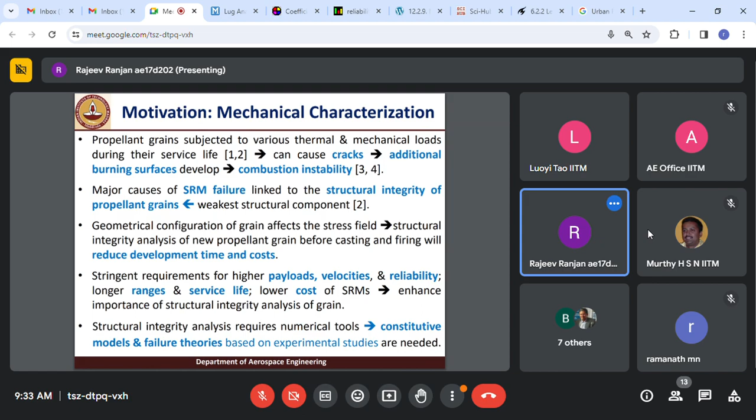The objective of this thesis was to study the mechanical behavior of composite solid propellant by conducting uniaxial tests and biaxial tests on cruciform specimens. Also, the fracture surfaces of these uniaxially and biaxially loaded samples are studied using a scanning electron microscope and energy dispersive spectroscopy to understand the damage growth mechanism and failure.

The scope of the work for this thesis was to conduct uniaxial and compression tests at constant displacement rates, for which DIC was utilized to measure strain. Relaxation tests have been conducted at constant strain. Biaxial tests on cruciform specimens are conducted at various displacement rate ratios and temperatures. The fracture surfaces under these loading conditions were then studied by taking into consideration fractography and energy dispersive spectroscopy.

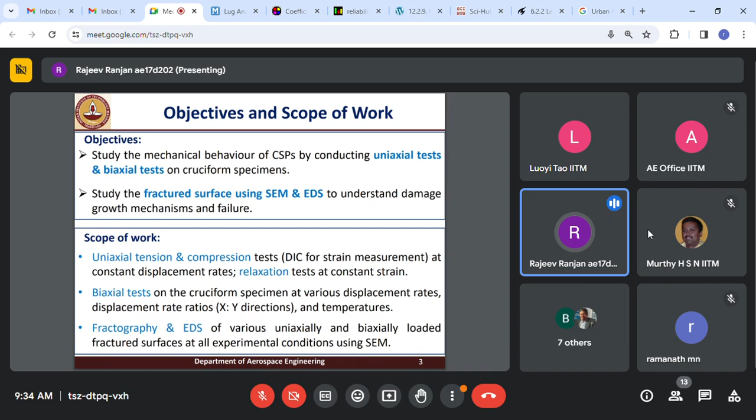This is a uniaxial tensile testing setup. A 500 Newton Zwick Roell UTM with a pneumatic grip is utilized for uniaxial testing. Two cameras facing the front and lateral surfaces of the specimen were utilized to measure all the components of strain and the deformation field. The uniaxial test samples were fabricated as per the ASTM D638 Type 4 standard.

Since the composite solid propellant is a viscoelastic material, relaxation modulus is an essential mechanical property. In order to get the relaxation modulus, a relaxation test is conducted at 5% constant strain. To reach that 5% strain, a high displacement rate of 500 mm per minute is considered. This is because a relaxation test is the response of the material to instantaneous deformation. Then at this 5% strain, the specimen is held for 180 minutes, and the decrease in force with respect to time is recorded.

Then using that force, stress is determined, and using this formula, relaxation modulus is determined. Here the blue line represents the experimental data of relaxation modulus variation with time. This experimental relaxation data is fitted with a Prony series, which is shown here. Eleven terms of the Prony series are considered, and we observe a good mathematical fit for the experimental data.

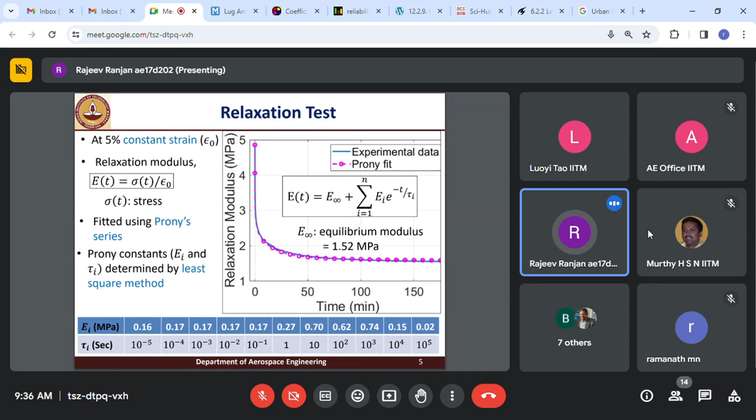Uniaxial tensile test was conducted at 1, 7 and 50 mm per minute. The dotted line here indicates the nominal stress, and the solid line indicates the true stress. For nominal stress, the initial cross-section area is used, whereas for true stress, the instantaneous cross-section area is required, and that instantaneous cross-section area we measured by measuring the instantaneous width and thickness of the specimen using DIC.

The first plot here indicates the stress-strain response of the material up to failure, and this plot is just a zoomed-in view of this stress-strain response up to failure. This plot is up to 50% strain to see the initial behavior of the material. It was observed that the stress-strain response was non-linear, and it was dependent on displacement rate. Tensile modulus and yield stress were increasing with increasing displacement rate.

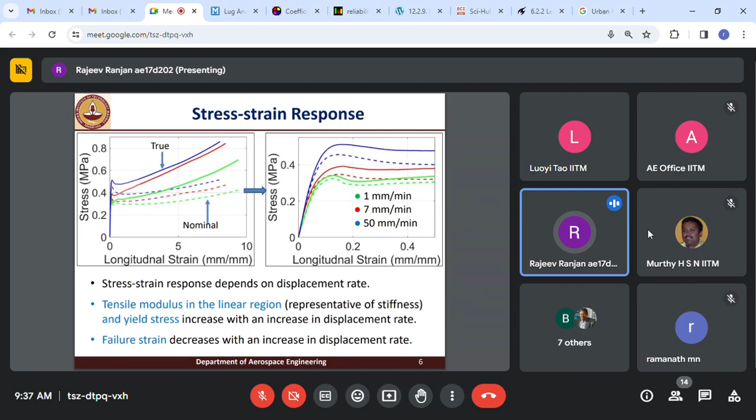Poisson ratio is also an essential mechanical property for structural integrity analysis, and it was determined during the uniaxial tensile test. Since there were two cameras, Poisson ratio was calculated on both the lateral as well as the transverse surface, and it has been observed that the Poisson ratio variation was the same on both surfaces and for all the displacement rates. It was close to each other. At the beginning of loading, it was 0.5, and then as the strain was increasing, the Poisson ratio was decreasing.

The reason behind this is that as the material deforms during loading, the bonds which are responsible for contracting the lateral and transverse surfaces of the specimen break, and then its capability to contract reduces, leading to a reducing Poisson ratio as the strain is increasing.

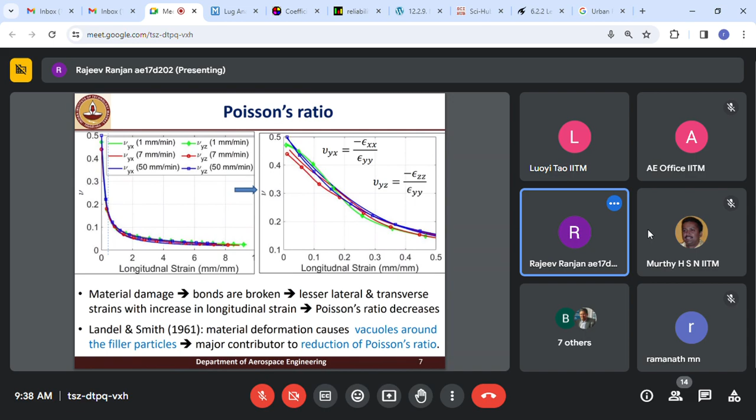We determined the dilatation during the uniaxial tensile test; this finite strain dilatation formula is used for that. This response shows the dilatation up to failure, whereas this is the zoomed-in view of the dilatation up to 50% strain. Since in composite solid propellant the matrix is a polymer material, which is nearly incompressible, and the solid particles are comparatively rigid, they don't undergo any volume change. So whatever dilatation we observed, we can say it is coming from vacuole formation in the material. So based on that, we divided the dilatation response into three regions.

The first region was where dilatation was nearly zero, up to 2% strain. So in this zone, there is no detachment of the solid particles and no vacuole formation. In the second region, the dilatation was increasing at an increasing rate. In this region, vacuoles are getting formed because of the strain in the material, and some existing vacuoles which formed after 2% strain are growing in size. So two phenomena, the growing size of the vacuoles as well as the formation of new vacuoles, are happening in the second region. That's why dilatation is increasing at an increasing rate.

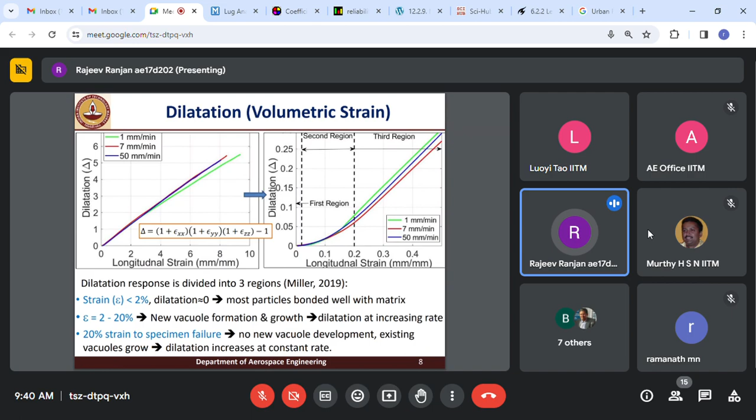In the third region, we observed that the dilatation was increasing at a constant rate with strain, and this is because after a certain strain, for this material around 20%, there is no new vacuole formation, and only the existing vacuoles grow in size, leading to an increase of dilatation at a constant rate.

We conducted a uniaxial compression test, and to measure strain, 3D DIC is utilized. This is because 2D DIC is suitable only for planar measurement of the strain or deformation field of a planar section which undergoes planar deformation without large out-of-plane deformation. However, in the compression test, although the surface was plane at the beginning of loading, as the load is applied, due to barreling the surface becomes curved, and also there is large out-of-plane deformation during compression testing. Due to these two reasons, 2D DIC is not suitable for measuring strains during uniaxial compressive loading, and that's why 3D DIC is utilized.

For 3D DIC, two cameras need to be placed at an angle as shown in the figure here. One of the problems in compression testing is barreling of the specimen. In order to minimize barreling, lubricant has been placed between the compression plates and the specimen surfaces. However, it was observed that we were not able to eliminate it completely.

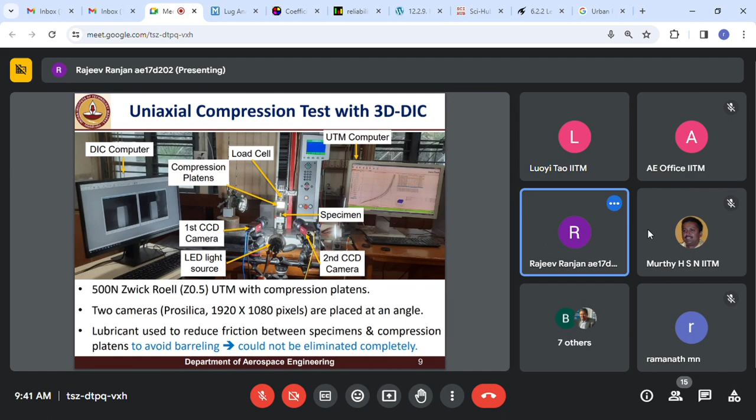This is the compressive stress-strain response. The first plot shows nominal stress versus nominal strain, and this is true stress versus 3D DIC strain. There was a large difference between the nominal and true stress responses. Similar to uniaxial tensile loading, here also it was observed that the response was dependent on the displacement rate, and it was nonlinear.

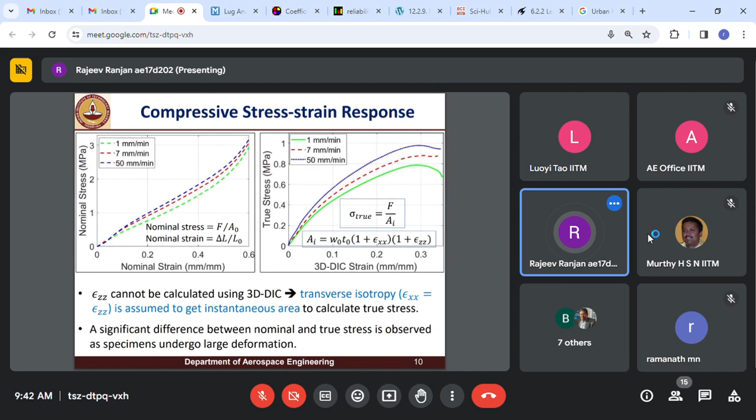During compression loading, dilatation and Poisson ratio were also determined. The same finite strain dilatation formula and Poisson ratio formula used for tensile loading is used for compression loading. We observed that up to around 10% strain, dilatation was nearly zero, and the corresponding Poisson ratio was close to 0.5. However, after that, both dilatation and Poisson ratio were increasing, and it seems the reason behind this is the barreling and damage in the material.

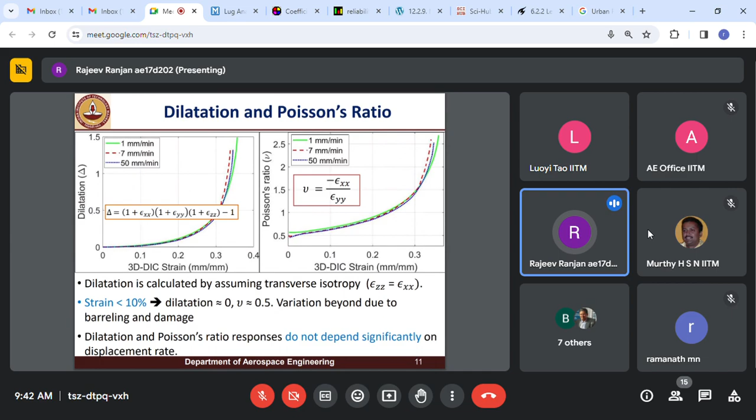We conducted biaxial tests, and there are two reasons behind this. First, the propellant grain in solid rocket motors is subjected to a multi-axial stress field, so conducting biaxial tests will be a more accurate representation of the expected behavior. Secondly, CSPs, when cast as grain in solid rocket motors, are quasi-isotropic in nature. However, upon loading, micro voids form and it becomes anisotropic, and biaxial testing is essential to characterize anisotropic material. Due to these two reasons, we conducted the biaxial test on composite solid propellants.

In literature, there are various techniques to do the biaxial test, like bulge test, combining tension and torsion, combining bending and in-plane, as well as combining axial load and internal pressure, or using cruciform specimens. Out of these techniques, biaxial testing on cruciform specimens is more promising, because different stress on the sample can be obtained by altering the displacement or load ratios in two mutually perpendicular directions.

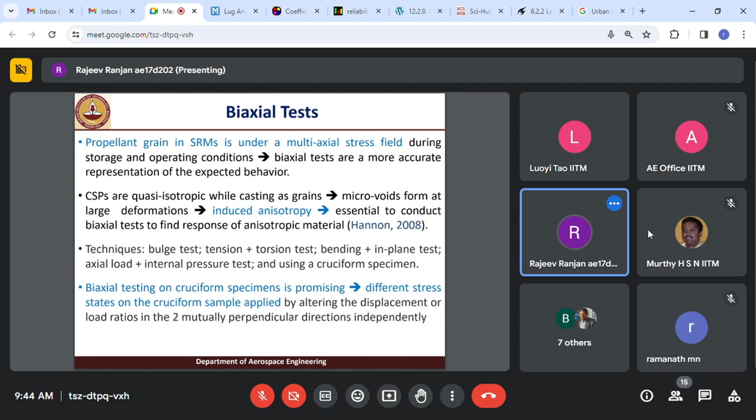In order to do the biaxial test, the first step is to design a cruciform specimen for composite solid propellants, because there was no standard geometry for that. To get the optimized geometry, we considered two design criteria. First, the stress should be maximum at the gauge area so that the specimen fails there. That is necessary because only then will we be able to capture the behavior of the material up to failure. Otherwise, one of the biggest problems in conducting biaxial tests is failure of the arm of the specimen. The second design criterion was that there should be homogeneous stress and/or strain distribution at the gauge section.

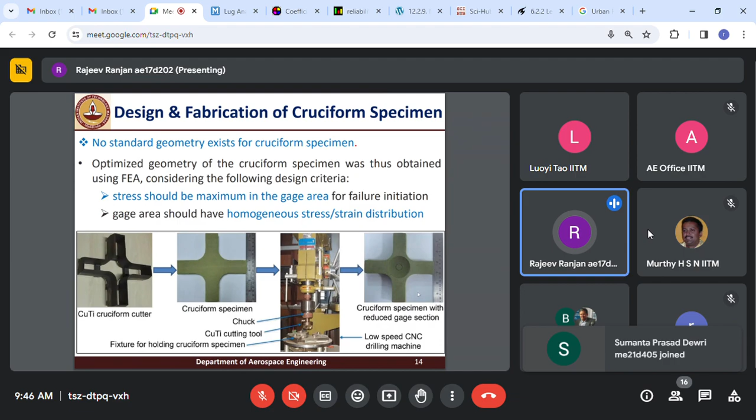This is the flowchart for the fabrication of the cruciform specimen. First, a copper titanium cruciform cutter was used to cut the cruciform specimen out of the CSP plate, and then using a CNC drilling machine, the center section of the material is removed. This is the final shape of the cruciform specimen.

Biaxial tensile tests were conducted on a 5 kN BISS biaxial testing machine, which contains a hydraulic power pack and a loading frame on which 4 double-acting hydraulic actuators are mounted, and each hydraulic actuator contains pneumatic grips which hold the specimen during the experiment. Since we conducted experiments at controlled temperatures, an environmental chamber was used. All 4 actuators contain load cells and displacement sensors. In this study, the average load measured by 2 load cells along each direction is considered for determining stress at the gauge section.

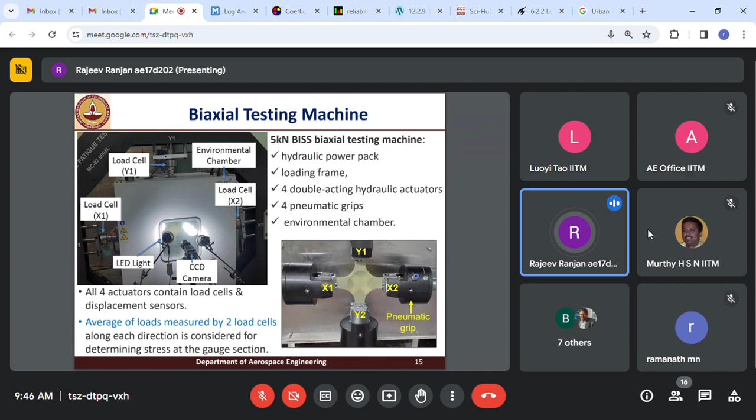Since in the cruciform specimen there is no clear resisting area, stress cannot be estimated directly as load per unit area. In order to calculate the stress, the fraction of applied load which bypasses the gauge section needs to be determined, and to do that, we used the FE software Abaqus. Since the geometry and loading were symmetric, only a 1/8 portion of the specimen is modeled, and symmetric boundary conditions were used. A hyperviscoelastic model was considered for this FE analysis.

Based on this FE analysis, we observed that the bypass factor for equibiaxial loading was 17.6% in both x and y directions, and for biaxial loading with a loading ratio of 0.5:1, it was 11.11% in the x direction and 20.05% in the y direction. We also conducted this FE analysis considering a linear viscoelastic model, and observed nearly equal bypass factors.

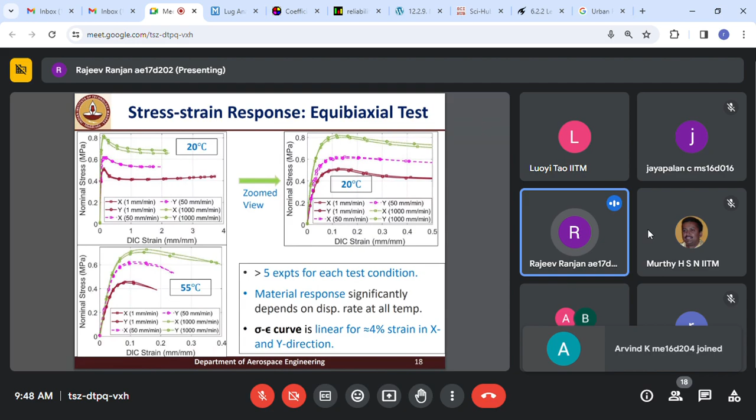This is the stress-strain response for the equibiaxial test up to failure at 20 degrees centigrade. This is the zoomed-in view of this plot up to 50% strain, and this is the equibiaxial test response at 55 degrees centigrade. For each test condition, at least 5 experiments have been conducted. For both temperatures, material response was significantly dependent on displacement rate, and there was a large decrease in failure strain when temperature was increased from 20 to 55 degrees centigrade. We also observed that the stress-strain response is linear up to 4% strain in both x and y directions.

During biaxial loading with a displacement rate ratio of 0.5:1, we observed these test responses, where again the dependence on displacement rate as well as temperature was there. Here also, with increase in temperature, there was a large decrease in the failure strain.

However, for this particular displacement rate ratio, it was observed that the stress-strain response is linear only up to 1% strain in x direction, and it was the same value as we observed during equibiaxial, which is 4% strain in y direction. This is happening because the displacement rate in y direction is double as compared to that of x direction. So materials are getting strained at a faster rate in y direction, and when actual visible damage effects start coming in this stress-strain response, the strain in y direction is around 4%, but since the displacement rate in x direction is less, the material becomes non-linear from the 1% strain itself.

Also, it was observed that the stiffness in x direction is very high as compared to the y direction. Generally, in polymeric or viscoelastic material, as the displacement rate increases, stiffness increases. However, in this case, since the displacement rate is double in y direction compared to the x direction, that higher displacement rate is causing higher strain in y direction, and that strain is acting as a pre-strain for the x direction, and that is the reason behind higher stiffness in x direction as compared to the y direction.

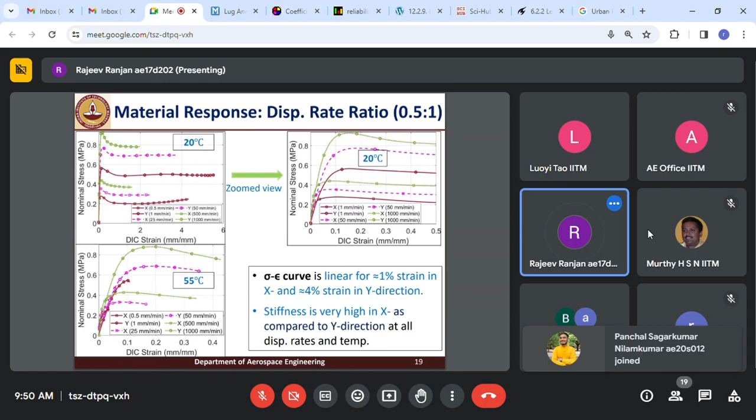In order to see the effect of stress field, uniaxial and equibiaxial test responses have been compared. This plot shows the stress-strain response up to failure for both uniaxial and biaxial loading, and this is the zoomed-in view of this plot up to 50% strain. We observe that the uniaxial and biaxial stress-strain responses are similar qualitatively. However, quantitatively they vary a lot. During equibiaxial testing, the yield stress was 25 to 47% higher as compared to the uniaxial test.

This is happening because in uniaxial loading, one of the surfaces is free. Load is applied in one direction, another surface is free to deform, so the material is offering less resistance. However, in biaxial loading, it is loaded in both directions, so there is no free surface. So the material is offering more resistance to deformation, leading to a higher yield stress. Also, it was observed that the failure strain during equibiaxial loading is 50 to 70% lower than that of uniaxial loading.

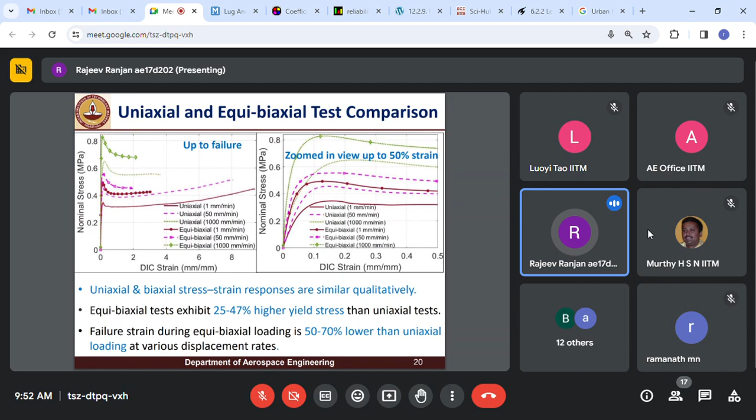This is happening because in composite solid propellant, when it is loaded, the failure mechanism is that vacuum holes are formed due to detachment of the solid particles from the matrix. Then the vacuum hole size will grow, this phenomenon will occur at various places in the material, and these various vacuum holes coalesce together to form the macro crack. The process of coalescence accelerates in the presence of higher triaxiality. During biaxial loading, triaxiality is higher than that of uniaxial. That is the reason for lower failure strain during equibiaxial loading as compared to uniaxial loading.

We studied the fracture surface for both uniaxial and equibiaxial loading, which is shown here. All the fractographic images shown here are taken at 20 degrees centigrade at displacement rates of 1, 50, and 1000. The first three micrographs are for uniaxial loading, and this is for equibiaxial loading conditions. We observed that for both uniaxial and equibiaxial, cavities are formed on the fracture surfaces, and this is because of the detachment of the solid particles due to dewetting.

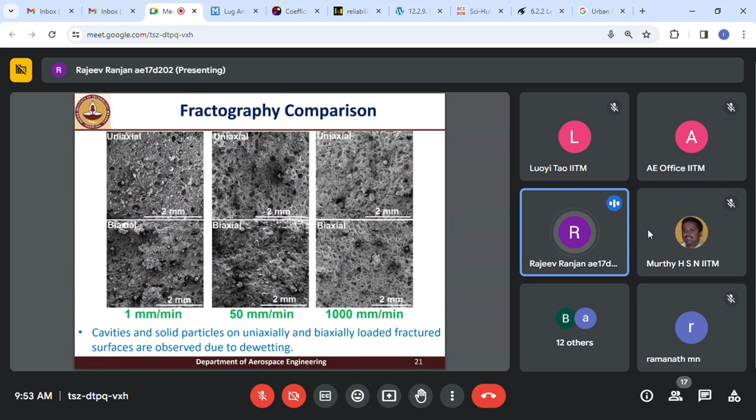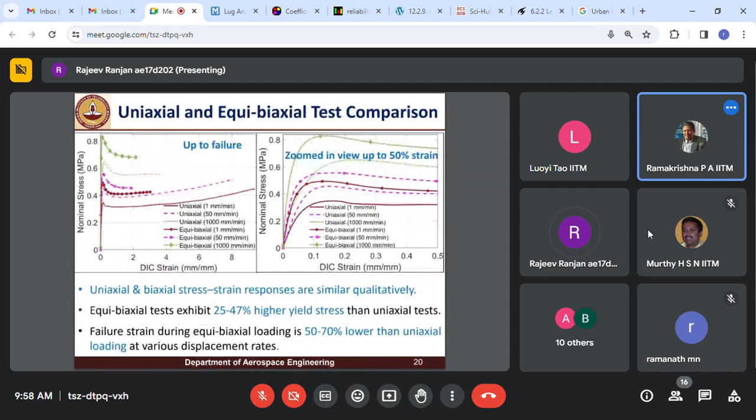So the first question was to provide a clear rationale why biaxial tests are more suitable. In solid rocket motors, there are various loads and stresses. One of them is the longitudinal stress, and the section view shown here is where the radial stress as well as the hoop stress acts. So in this propellant grain, there is always a combined stress field. That's why biaxial tests, which simulate the combined stresses, are more essential for studying the CSP behavior. So in the thesis, we rewrote this motivation.

Not we, you. Sorry, this is not joint. Yes. Murthy, I think, got his PhD long back. Yeah, 20 years. Okay, next. Something was there, no?

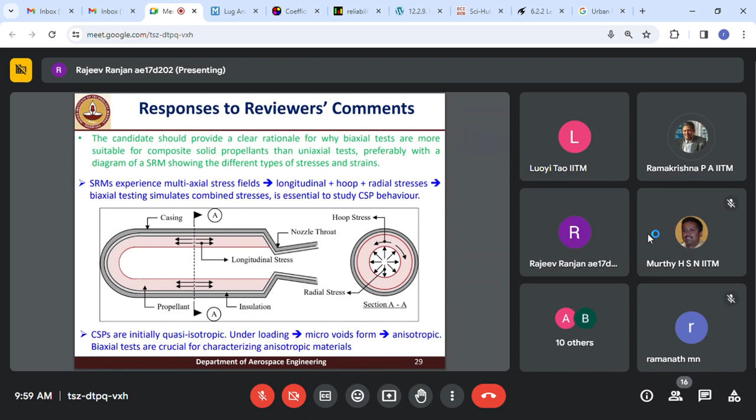Yes, sir. Another question was that I proposed some future works, and it was mentioned it would be better to explain how they will be meaningful to the solid rocket propellant industries. So for each future work, I added how it can be meaningful. The first was conducting uniaxial tensile and compressive tests at different temperatures. The mechanical properties obtained at all these temperatures will be crucial for designing the SRM because of their operational temperature.

Suppose I say I don't want to do it at higher temperatures and I do it at lower temperatures. Is that fine or is it bad? I don't have a high temperature facility; I only do it at low temperatures. Okay, so a few properties like stiffness will increase at lower temperatures and be lower at higher temperatures, so that difference in properties will be there. And generally at lower temperature, failure strain also decreases.

So that is why I am asking you. If I do it only at lower temperature, can I say it is safe at higher temperature? I think no, sir. Unless it is observed how much difference in properties there is, we can't say. Okay. There are a few propellants that show very large variation in properties with respect to temperature. Okay. Fine. I'm done. Okay.

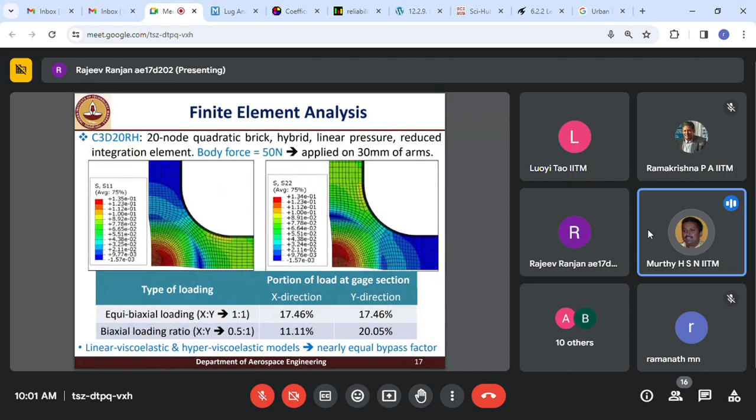Okay, Murthy here. I want to ask a few follow-up questions. One is, Rajeev, the slide number 17 part which Rama asked. In that part, where did you get these properties from for doing this analysis? For the hyperviscoelastic model, the hyperelastic properties in Abaqus have to be fed in the form of the nominal stress response. Yeah, but where did you get that response from? We conducted uniaxial tests, sir, so that response I fed to Abaqus. That's essential to mention.

Okay. So the other part is the last slide, which Rama was asking about. The question really is, is lower temperature or higher temperature bad when it comes to propellant? Bad in the sense of leading to earlier failure. Sir, for this particular CSP which we studied, with increase in temperature there was a huge decrease in the failure strain. So for this propellant, it was actually higher temperature which is bad.

Okay. So I cannot look at lower temperature and say this is the most conservative case. No, sir. Unless at least uniaxial tests at different temperatures are there, it will be difficult to make decisions. Okay, so that's it from my side.